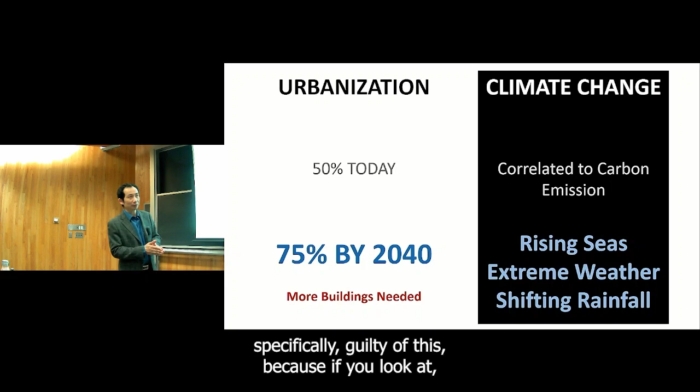We look at the challenges of the 21st century. We think about, as structural engineers, it's a fight between urbanization, where we need more houses, and climate change, because whatever human activity we do nowadays seems to have a negative impact for some reason. I don't know. But the construction industry is actually specifically guilty of this, because we're congregating into cities, we need to provide more density in housing. We build our cities out of steel and concrete. Combined, they are responsible for about 8% of total carbon emissions for humankind, which is actually surprisingly high.

There's other studies from some colleagues of mine who study building energy and all that. The buildings, this is just like the first down payment, right? Then you have to maintain the building, use energy to cool it down or heat it up. It's a lot of energy. But the things I studied, or the need coming out of this building infrastructure development, is more focused on the down payment side, which is what we use to build our buildings.

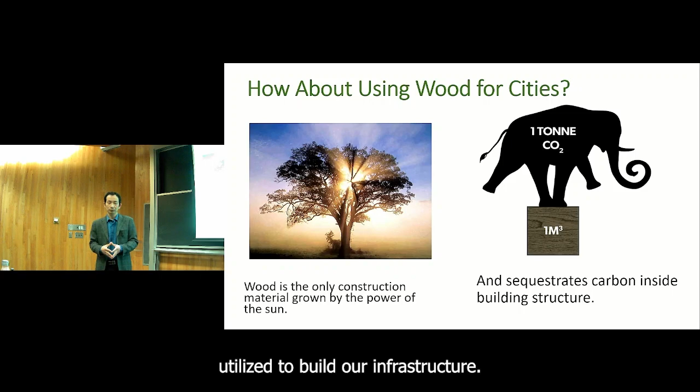The use of timber has been around for thousands of years. In fact, aside from mud and stone, it is the first engineered material humans ever utilized to build our infrastructure. The material, different from steel and concrete, is actually grown by the power of the sun, and trees suck CO2 out of the atmosphere and materialize it into fiber, where it provides strength to build our material.

As you can see, 1 cubic meter of wood, if you can take it and put it in a building, that building is going to be here for, you'll be surprised. You go into some old neighborhoods, you see stick-built buildings that have been there for 100 years. It's going to sequester that carbon for a long time. In fact, I'm coming from Colorado School of Mines, where people actually actively grab CO2 and pump it down into empty mine shafts to store it.

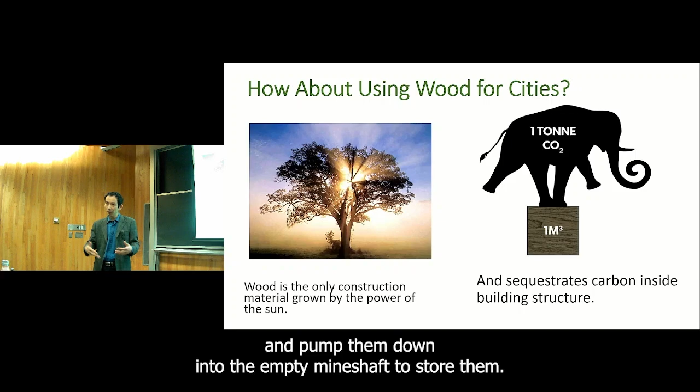But why don't we just build more wood buildings? The issue with wood buildings, if you look at, some of you took the class, it's what we call light frame wood construction. That's the most common in modern history. In older times, like in Japan and Europe, you had what we call heavy timber structures where they just use the whole tree, cut it, and build it. The issue is that although there's some pretty cool structures, like in Japan you have 5-story pagodas, our cities don't look like that.

We need something like this. You go above ground, and you look around, you see skyscrapers and tall buildings. Probably at the rate of urbanization right now, we don't need to be like China, where people all live in 30-story apartments. But I think hitting something between 10-story and 20-story would be kind of ideal for a population density like the US and the Western world.

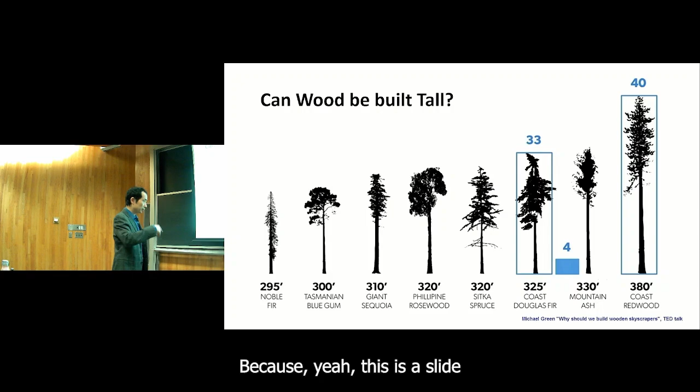So can we build wood that high? This is a slide I stole from Michael Green, who did a TED Talk called Why Should We Build Wooden Skyscrapers? If you haven't watched it and you're interested, you should search it up. Back then when he made this slide in Canada, since he's a Canadian architect, the building code allowed a maximum height of 4 stories for wood buildings in Canada. Now we have great improvement - it's going to increase to 6.

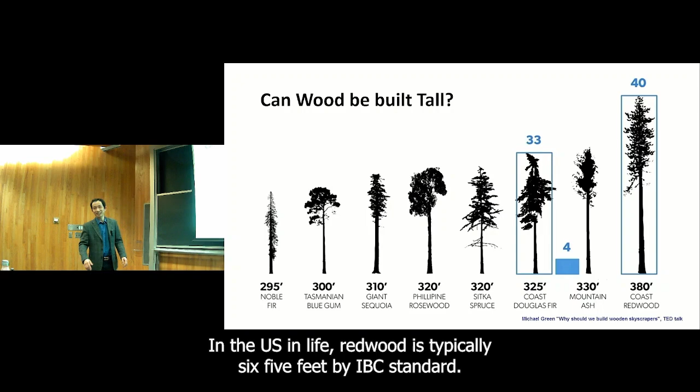In the US, for light frame wood, it's typically 85 feet by IBC standard. But if you look at natural trees, they can grow up to about 40... in fact, the most common wood species we use to build our 4-story or 6-story buildings can grow 33 stories tall. We call them Douglas fir, part of the fir family species.

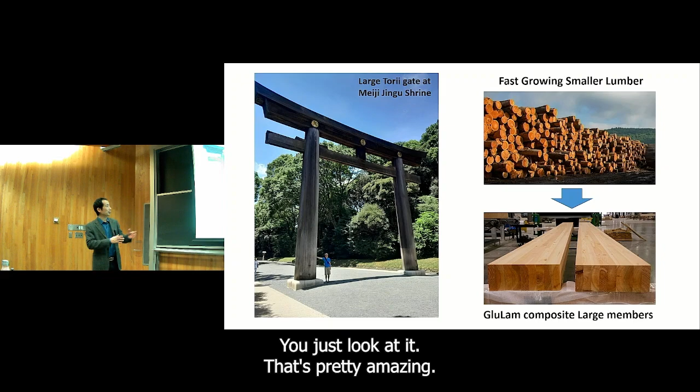So strength-wise, you don't need to worry too much. The way we build it - in ancient times, if you wanted to build a big, tall building, you needed a big, tall tree. This is a picture of me - this past summer I was visiting Tokyo. They have the largest wooden torii gate in Japan. Just look at that, it's pretty amazing. But we don't have that anymore.

What we have commercially available nowadays is fast-growing, small-diameter lumber. But we've also developed technology to glue them together to whatever size we want - glulam technology. A lot of people ask me about mass timber, saying 'oh, is the glue toxic?' Nothing is new here - we've been using glued-up timber members for a very, very long time.

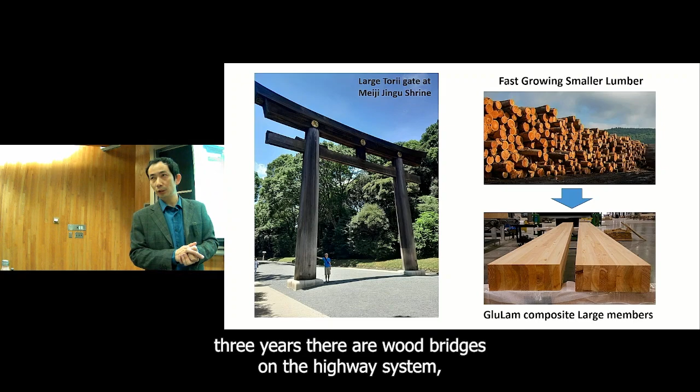If you just drive around the US, like in South Dakota where I taught for 3 years, there are wood bridges on the highway system that have been there for decades. But what really kickstarted the mass timber movement, as we see it, is a system we call CLT, cross-laminated timber.

The concept is quite simple - you just take a lot of small dimensional lumber. In fact, most of those, what we call laminas, are smaller than your typical 2x4. They actually take 2x4s and plane them down even smaller, then cross-laminate them, so you can have any odd number of layers.

Like you can have 3-ply, 5, 7, or 9-ply at some point. Suddenly you have the ability to build the entire building - not just your columns and beams, but the whole building with walls and diaphragm, everything in solid wood. Because before this, if you wanted a diaphragm, you had to do joists using OSB, and they run into the same problem with why we don't build wood very tall in the first place: fire.

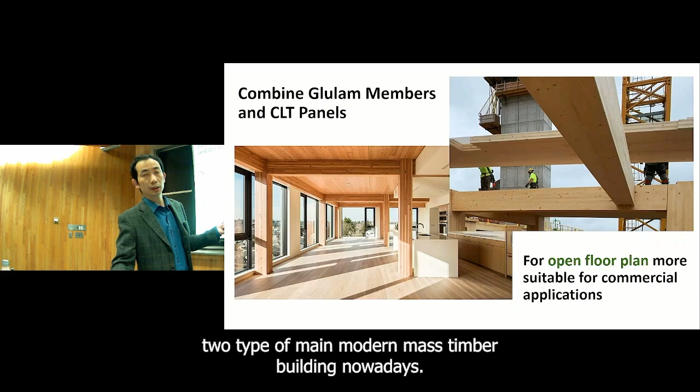Then I'll talk about fire, right? Fire is kind of interesting because it's counterintuitive - fire is actually one of the perks for mass timber. If you think about building something out of wood, under high temperature, wood is actually the only construction material that can resist high temperature for a prolonged duration. You might say, well, what about steel?

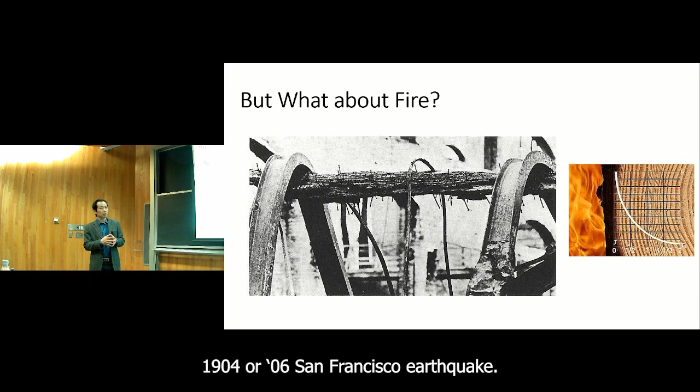What about concrete? There's nothing wrong with concrete, but it's mostly about the steel. Because when steel gets hot enough in an enclosed fire situation - like this picture from the 1904-06 San Francisco earthquake, where after the earthquake there was a fire in an enclosed warehouse situation - temperature rose to thousands of degrees. The steel under that high temperature starts to soften a little bit, and once it softens, you see things like this.

In the case of World Trade Center from the NIST report, it's not the initial impact but the fire that softened the steel column. Then you have a lower E, and your buckling load is calculated by the EI, then things buckle.

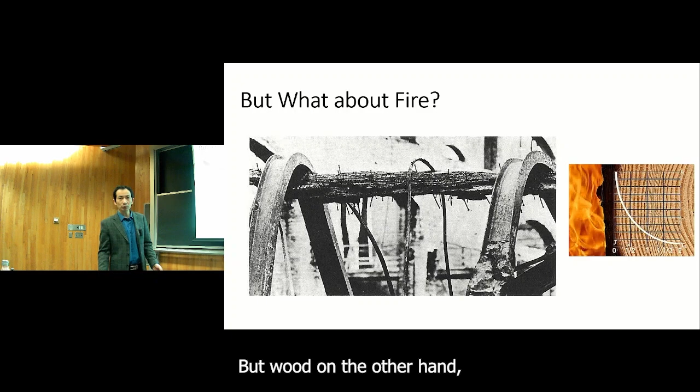But wood, on the other hand, burns too, of course. But once it burns, it forms a char layer. In fact, in wood fire design, we use a factor of about an inch and a half per hour of char layer. So once your char layer develops to like an inch or 2 inches, it's hard to burn through.

For example, this is a picture of a building they tested in Canada. It's just a chamber where they used gas to burn it for like 3 hours. Inside it looks pretty bad, but the researcher can actually put his hand on the other side. So in fire design, if you contain the fire within wood, it can actually withstand a lot of fire.

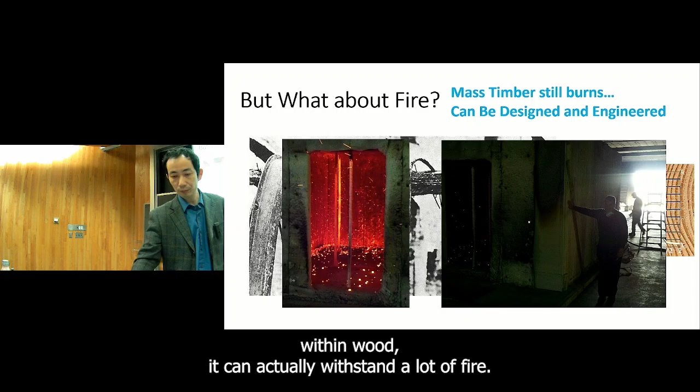So you combine all that benefit of utilizing mass timber components, including large section glulams and also mass timber panels. You have a new way to build tall buildings in almost 100 years, if you define a tall building as any building above 10 stories. Why 10 stories? I'll tell you why later.

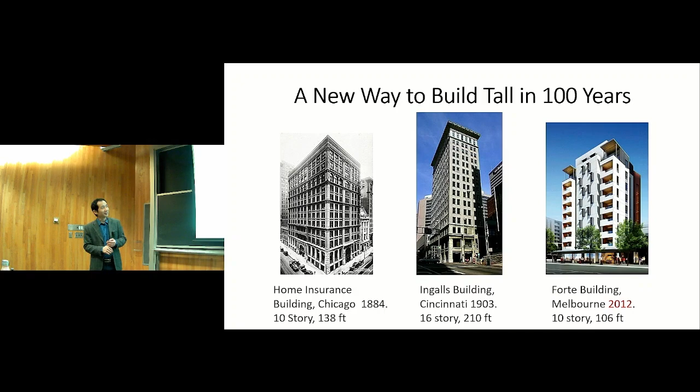So the first tall steel building is in Chicago, built in 1884. Then the first one in concrete is in Cincinnati, 1903. After that, if you want to build anything above 10 stories, you have to use those two types of materials, until that record gets broken by 2012, more than 13 years ago, in Australia.

The Forte building is 10 stories, apparently that was 13 years ago. So what is it now? About 10 years later, you have the Norway building, that's 18 stories, all wood.

This one's kind of interesting. In fact, last year they had the World Conference on Timber Engineering in Norway. Some people actually lived in it, this is a hotel, they kind of stay there. I didn't get to go because I didn't get my visa.

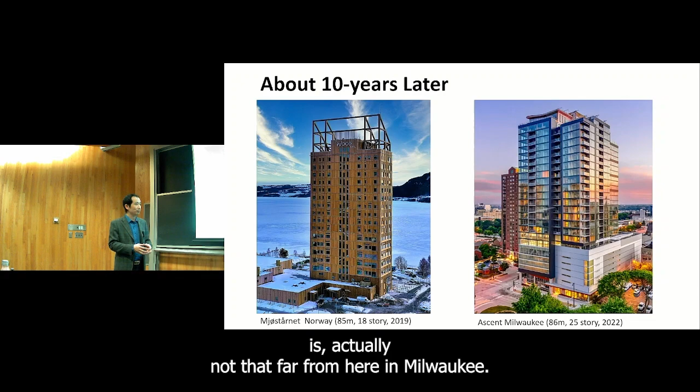So right now the world record holder is actually not that far from here, in Milwaukee. A 25-story mass timber building, but it cheated a little bit because it's actually 8-story concrete plus 17-story mass timber. So the Norway one, 18-story, is full wood.

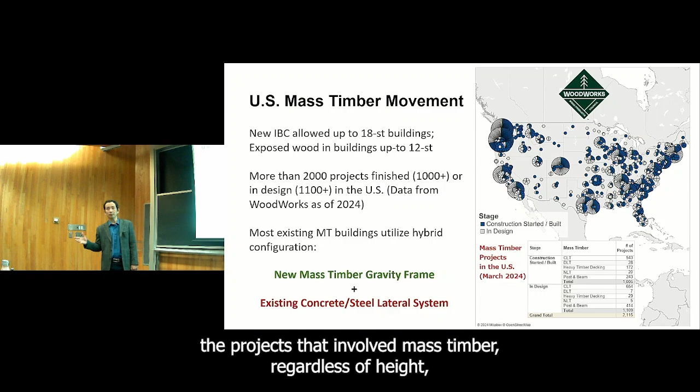So you've probably heard of this term called mass timber movement. It's not just the US, it's around the world, but specifically if you look at the United States, the projects that involve mass timber regardless of height—because most of them are like malls, 2-story, 3-story—there's about 2,000 projects around the US that have been planned or already built. In fact, like 1,000 of them are already built or under construction.

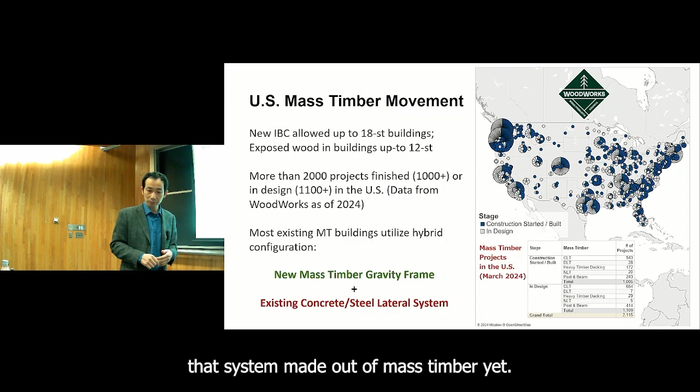There's a new trend for a sort of hybrid approach where they use a mass timber gravity system, like what I showed you, the glulam beams, columns, and panels. The lateral system, they use either a concrete core or a steel brace frame. Why? Because there's no code-recognized lateral system made out of mass timber yet. There's one, but people for some reason don't use it that much. And you notice a lot of those projects are happening in seismically active regions.

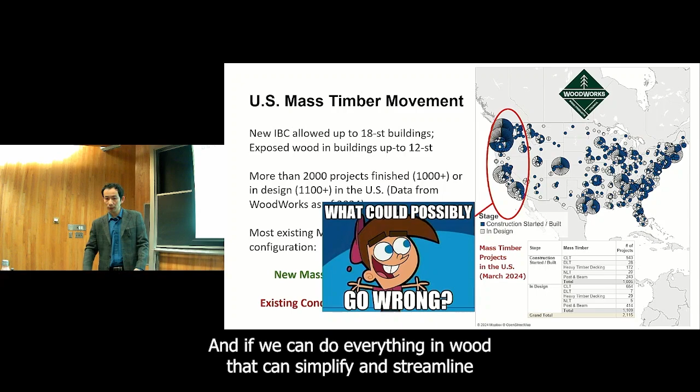So the idea of my research project—now kind of pivoting to what I do, I don't do all mass timber, just one aspect—is to think, if we're going to build that many mass timber buildings, instead of bringing a concrete contractor, a steel contractor, can we do everything in wood? And if we can, simplify and streamline the construction process, hopefully save money. And also, maybe if nobody's ever done that, it's a new type of combination. It's actually not a combination, it's just mass timber gravity system plus the mass timber lateral system.

Could we do it better? Could we do it right the first time to actually make our lateral systems more resilient than what's already been observed? I assume a lot of you, although there's no wood class, know what resiliency is, right? People talk about resiliency.

But seismically, I think a picture is better than 1,000 words. We can look at a very classic example of how the modern code system or modern design philosophy performed in a large earthquake in a highly populated region. In this case, the New Zealand Christchurch earthquake, a magnitude 6 earthquake.

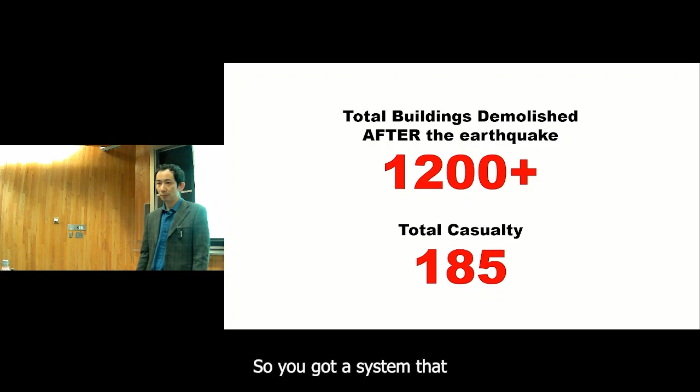What you see is, for some reason, after the earthquake, people prefer parking lots instead of buildings. This is what they call rebuild. So you've got a system, you've got an event, right?

It's not so much of a disaster from a casualty standpoint - of course, even one casualty is not good. But in fact, most of the casualties, like 180 some, came from one collapsed building in Christchurch, if you do the research. So most of the buildings, they did very good - they did exactly what our design code asked them to do, which is sacrifice themselves to dissipate energy but remain standing so people can get out. But the building, it dies.

This is called the code-compliant or life-safety requirement, which is the philosophy followed by most developed countries, with the exception of probably Japan, maybe Chile. So if something like that happens in downtown LA again, like Northridge, we'll have the same thing.

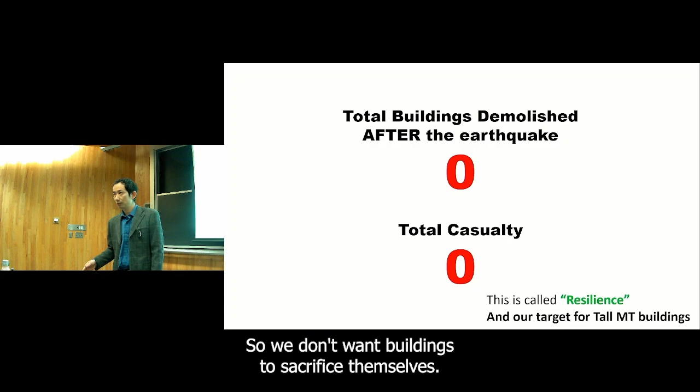What we really want is this - it's called resilience performance. We don't want a building to sacrifice itself. During an earthquake, we want the building to not only withstand it but also be at least repairable afterward. And wood is really in a good position to do that.

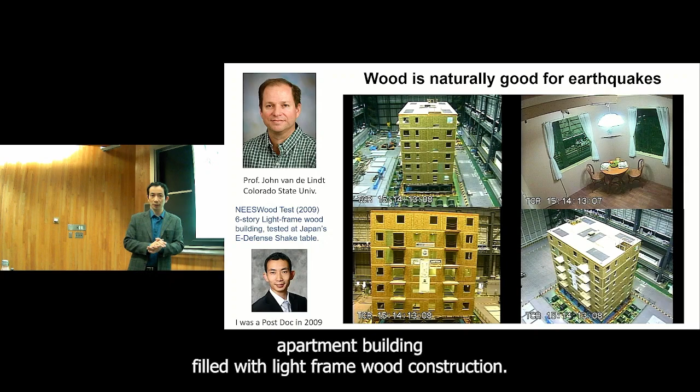Even 16 years ago - not that far, 2009 - there was already mass timber in Europe, but we didn't know that yet. Myself, as a postdoc back then, and my advisor Professor John van de Lindt, we went to Japan and tested a full-scale apartment building built with light-frame wood construction. We selected 6 stories tall because, like I said, that was the tallest we could build at that point.

So we tested this under a Northridge earthquake times 1.8. That's the test you're going to see here. It's a 3D test, and you see the room on the corner where the lights are on. The little plates you see there are the added mass - you've got to do the math right.

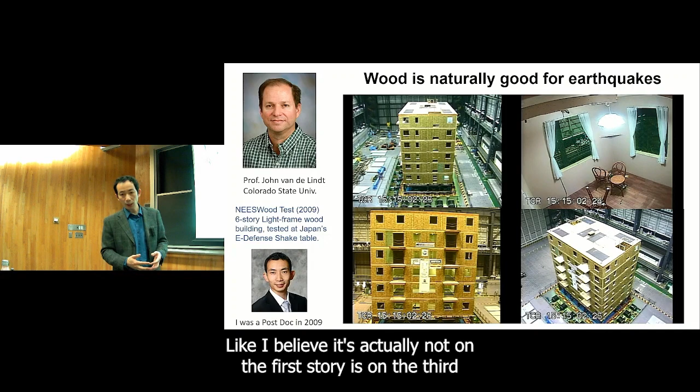We went to Japan and built this building in about 4 months, then ran 5 tests. Typically, when you do a big test, you do a small design level test, then this, which we'll call MCE, and after that we check the building. I believe it's actually not on the 1st story - it's on the 3rd or 2nd story. You see most of the damage: drywall cracks, some nail pull-out. But the building is great - it's actually repairable.

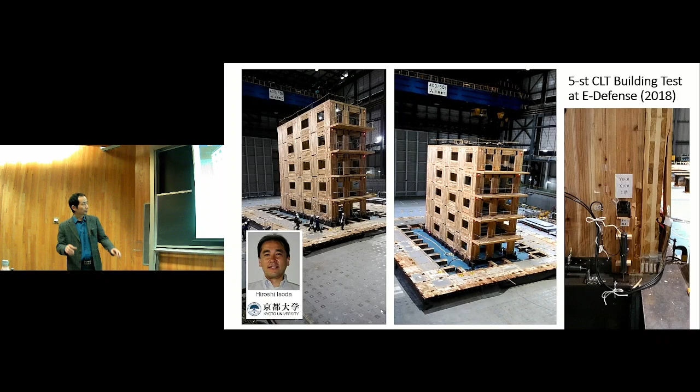After that, other researchers around the world started to say, okay, could we do the same thing with mass timber? This is a friend of mine, Professor Isoda at Kyoto University - they did a test of a 5-story CLT building, also at E-Defense.

Those tests basically give us confidence because wood is very flexible and lightweight, about a quarter of the unit weight of concrete. So yes, we can do that, but the difficulty with those problems is that traditional wood construction, including mass timber, develops ductility within the connections. If you want to develop ductility in connections for concrete, you need to yield your rebar. For wood, you need some sort of damage - the pull-out of nails or things like that.

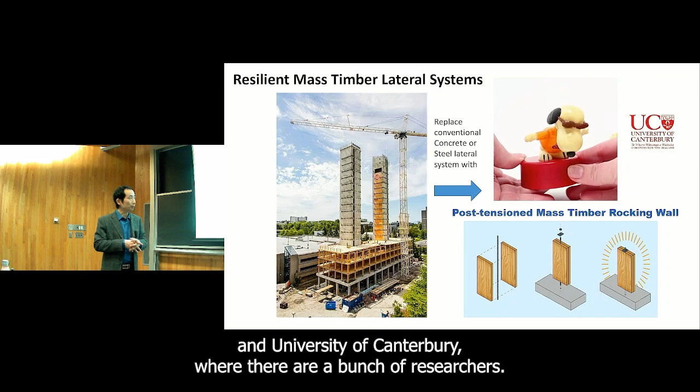So can we go beyond that? The idea came from New Zealand, at the University of Canterbury, where there are a bunch of researchers. They started as PT guys - post-tensioned concrete frame guys and all that. Then suddenly, because New Zealand, like Canada, exports a lot of timber, they thought, could we do PT on timber?

So they started thinking about what we call a rocking wall, which again is not a new concept - precast concrete rocking walls already existed. But the idea, if you've never heard of it, is just like a push puppet, where you have a PT bar on a block of wood or concrete. Then when an earthquake comes, it rocks.

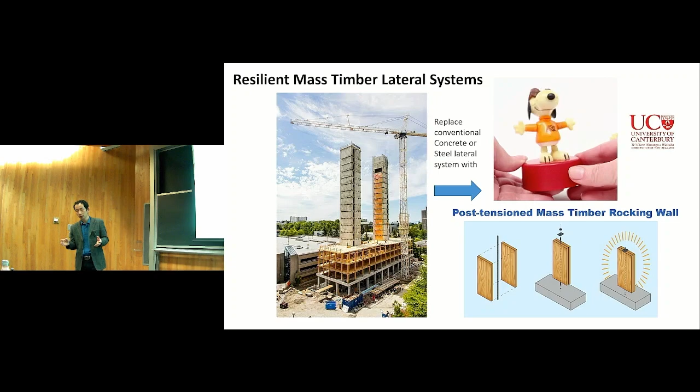If you fine-tune the PT force and concrete, the PT force geometry of your block, and also the area of the reinforcement to not yield during that period, then after an earthquake you're going to self-center. So we want to use that to replace construction, a hybrid construction like this. Use the concrete tower with... no, we don't want a concrete tower. We want everything wood, using a rocking wall.

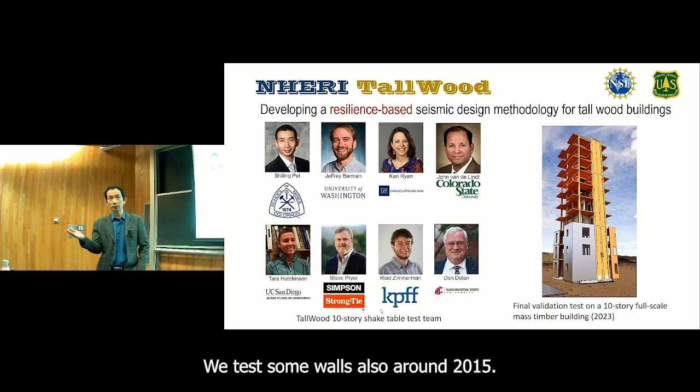That brings us fast forward a couple of years to the NHERI TallWood project, where we didn't go directly to a 10-story test. We actually did our normal component level testing first. We tested some walls at WSU around 2015, then we did a 2-story test on the UCSD shake table in 2017, then we got to the 10-story, which is the same picture you see on the title slides.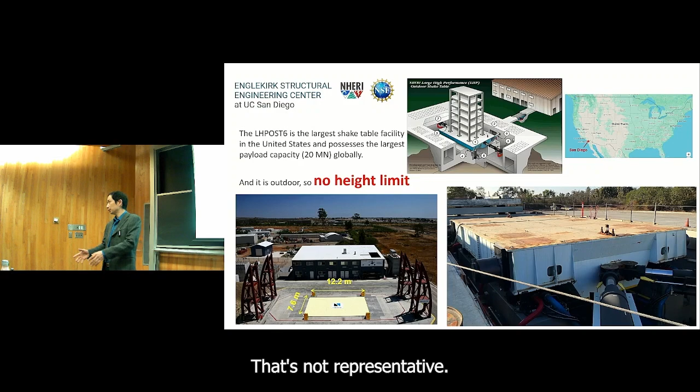This is the tallest full-scale building ever tested on a shake table anywhere in the world. I think we're going to have that record for a while. The UCSD shake table is in San Diego, and it's outdoor, which means you can build as high as you want. But of course you need to pay attention to your aspect ratio, because you don't want to test a pencil - that's not representative. It turns out a 10-story is almost the limit of that aspect ratio that could still kind of happen in real life. It almost represents a worst case scenario. So that's why we chose 10.

Another kind of funny thing is I always jokingly say that the only contribution I have to the NHERI TallWood project is deciding that it has to be 10-story. First, because it's double digits. Secondly, it's easier to fundraise.

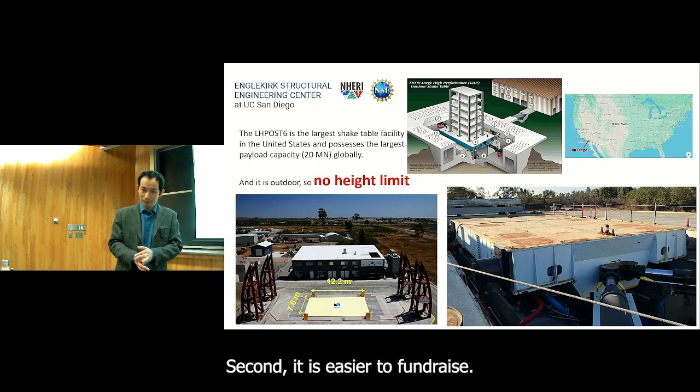When we proposed the project, the UCSD shake table was only 1D, but during that time they upgraded it, and it suddenly became a 6-degree-of-freedom shake table. Of course we didn't use the rotational degree of freedom in our test because seldom do people do that. But this is actually very neat, and I'm very happy about it, because you spend so much effort and time to build the building, and you want to test it in what they call a real earthquake, in 3D.

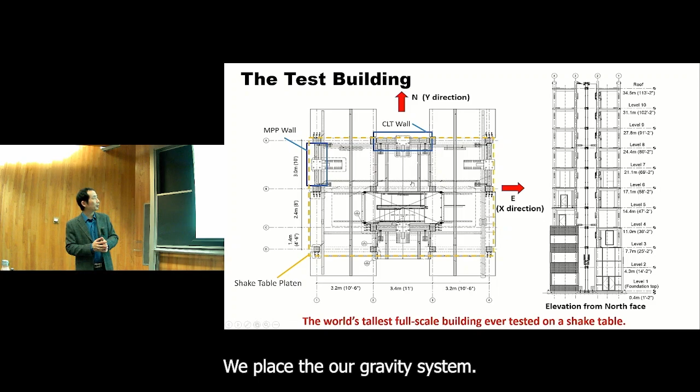The test building itself - as you can see, the yellow outline is the shake table. We placed all our gravity system, you see those columns, there's like 12 of them. Oh actually, yes, there are 12 of them, or actually 14 of them. And then we used overhangs to create patios where we could have different building facades, to look at non-structural performance, because we want to achieve resiliency, which means we also want to minimize damage to non-structural systems.

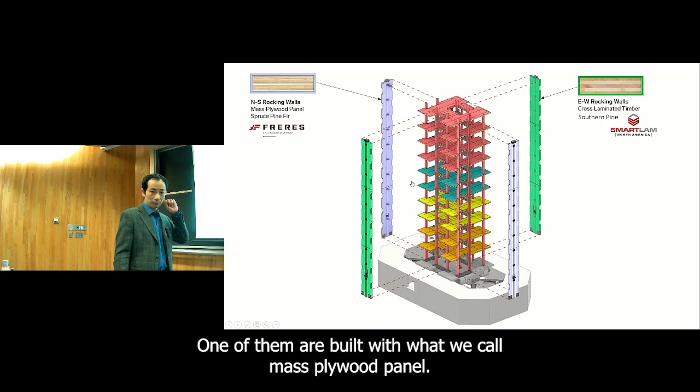The building itself is like a mass timber products museum, because we got donations from everywhere. There are 2 rocking wall pairs - one is built with what we call mass plywood panel, which is just plywood but you keep layering it until it's this thick, then you have CLT in the other direction. Then we have CLT and what we call GLT from Europe, donated for 4 stories. Then we have nail-laminated timber for the next 3-story, 4-story, 2-story sections. And finally another mass plywood type product from Boise Cascade for the top 4 stories.

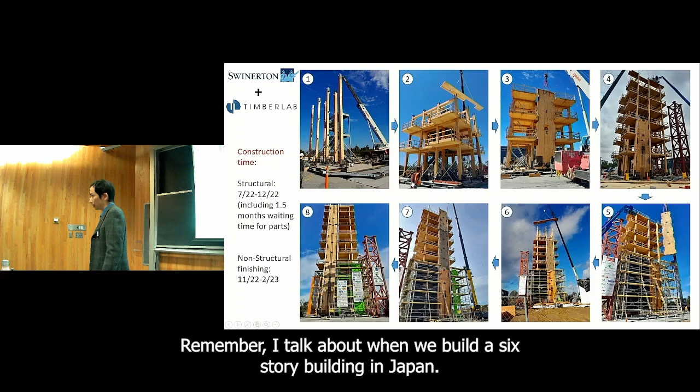All the connections were donated by Simpson, except the ones we had to specially design. The construction itself was actually quite fast. Remember I talked about when we built a 6-story building in Japan, it took us 4 months. This one also took about 5 months, but there were some little accidents in the construction process - we had to wait for a part to be manufactured, which slowed us down. So really, you're looking at about 3 months to do the whole thing.

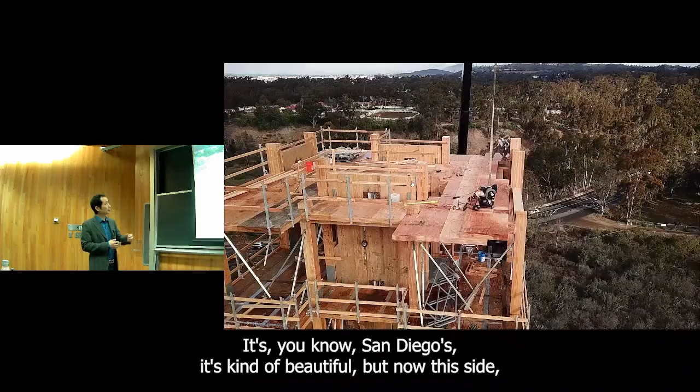Just to give you an idea of the scale, this is the last panel we put on the roof. It's a drone shot of San Diego, so it's kind of beautiful. On this side you have rural San Diego, but when the camera pans you see downtown San Diego. The ocean is on this side.

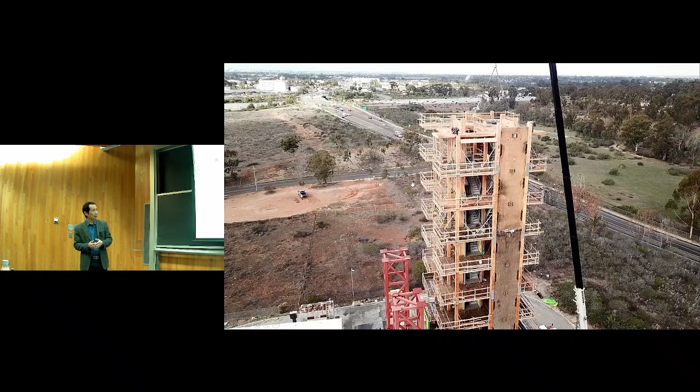It is really quite impressive. You see the red towers? Those are 6 stories tall, and they are there to prevent the specimen from collapsing into the white building down here, which is a control building with all the hydraulics. They're like, oh yeah, we have a 6-story tall tower, should be enough.

The PI of the site actually asked me to bolt some anchors with steel cables to tie the top 4-story to the other side of the testing site. But in the end, everything works out. We didn't collapse it. I don't think they'll ever let us.

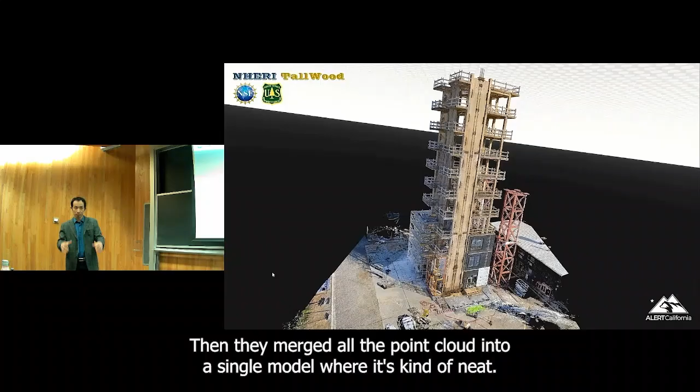So after the construction, we went into what we call the instrumentation phase. This is just a cool thing that we want to show. There's a collaborator at UCSD. They use LiDAR on a drone and handheld device. They walk the entire building, then they merged all the point cloud into a single model, which is kind of neat.

So if I was not sure if this type of connector was used, I can actually go in and check every single screw in the point cloud database. Nobody's ever done that, but the data is there. So the building is not there anymore, but yeah, this is very pretty cool stuff that you can use.

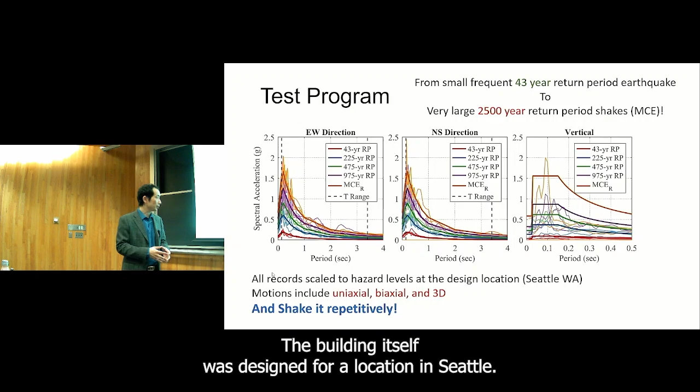The test program, apparently you're gonna kind of ramp it up. So we actually targeted 5 levels. The building itself was designed for a location in Seattle. That location is actually chosen by the graduate student working on it - it's her favorite coffee shop in Seattle.

So you can see we're trying to match the ASCE 7 response spectrum, the multi-period response spectrum of the location. For the vertical, now that's kind of new for ASCE 7. We didn't try to match it, but it's kind of a ballpark - it's about right.

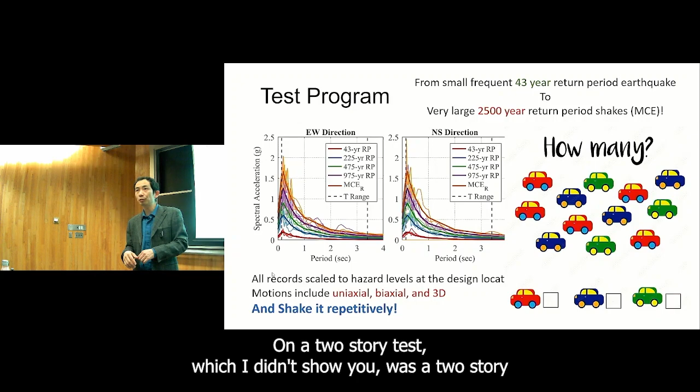But then the question is, okay, how many earthquakes do we want to run? I was first asked about this, and I said I don't know. Because if you think about it, in Japan we run 5 tests, then we have to stop because everything's cracking. Then on the 2-story test - I didn't show you, but 2-story mass timber with rocking wall - we ran 14 tests. So for this one I said, oh yeah, we'll run at least 20. But who knows, right? You just keep running, but it just refuses to get damaged. And then we're like, yeah, since we can get more data, why not?

It's so much effort. So what we did is we ran a total of 88 tests in the first phase, where you can see the PGA, peak ground acceleration, of the earthquakes. You can see we kind of ramp it up to the design basis earthquake.

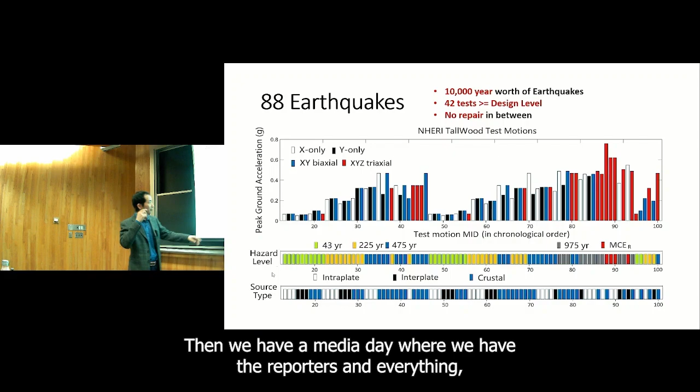Then we have a media day where we have the reporters and everything, NSF folks, and then after that we get everybody out. Then we keep ramping it up to MCE, and then finish it off. As a matter of fact, if we're not confined by the subsequent phases that are coming after us, that we have to kind of get going, we could easily run more.

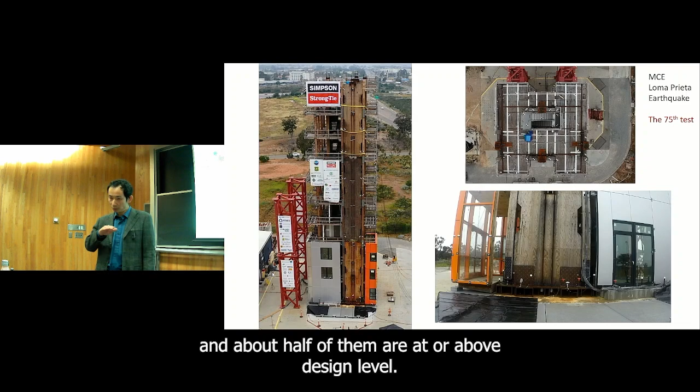I'll show you just one, but apparently it's going to be the largest one - this is the 75th test. Remember, this building has been going through 74 earthquakes, and about half of them are at or above design level. And this is the 75th, without any repair or any care.

So you see a top view that's from a drone, and then you see a close-up on one of the rocking walls at the base, and then the overall building. And also this is a 3D test, so you hear the vertical component coming out first.

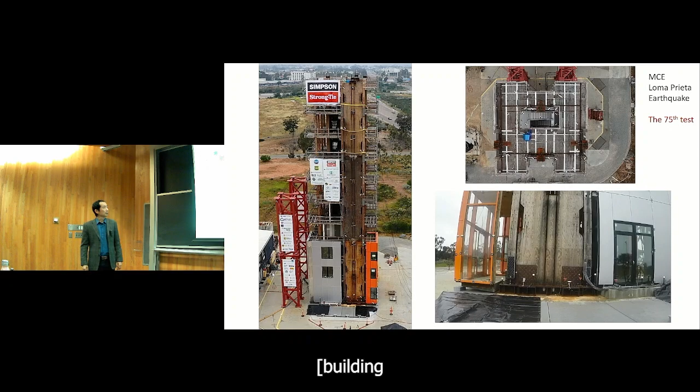You can very distinctly see the 2 phases of the dynamic response. The first phase is when the earthquake input has a lot of higher frequency component, where you excite the building in a higher mode. And later, when the earthquake starts to die down, you see the building revert to the first mode, and the first mode actually produces the maximum displacement demand. The higher modes produce the maximum force demand.

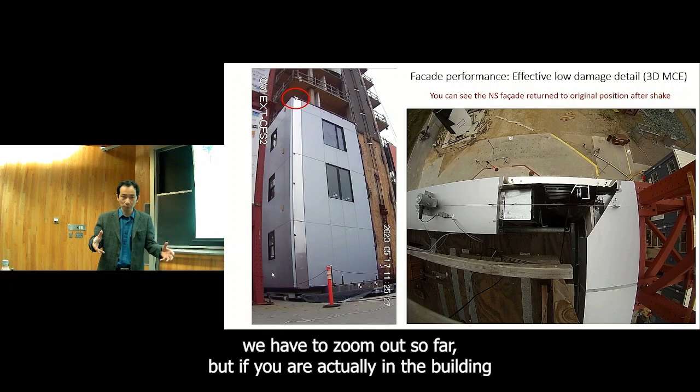So the video you just saw, we had to zoom out so far, but if you're actually in the building, as you can see, the non-structural components - this is the facade where we use a sliding detail. You'll know exactly what I mean after you see how it moves. And then we have a GoPro camera looking at the corner of those 2 facades from above.

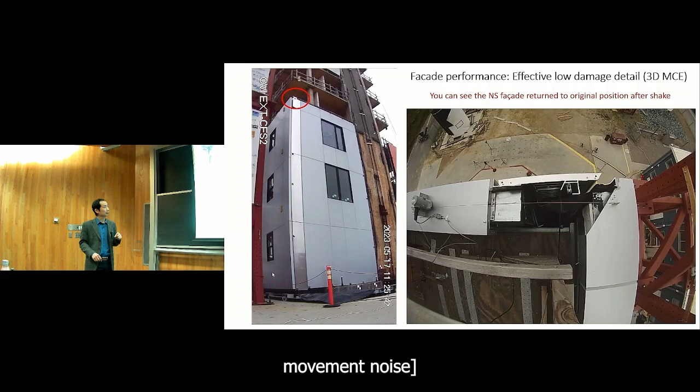That's the first mode. Yeah, you move a lot.

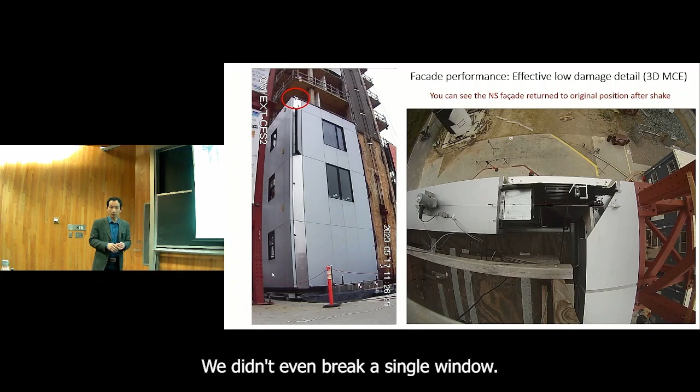This video is great because it proved 2 points. First, if you detail your non-structural systems carefully, they can remain damage-free. We didn't even break a single window. Second, non-structural systems don't have the ability to pull themselves back, but the fact that you see them ending exactly where they started means the building self-centered. So I don't even need to show you why it's self-centered, because the non-structural systems came back, you know the building is self-centered. Of course, we also have direct measurement evidence that there's no residual drift.

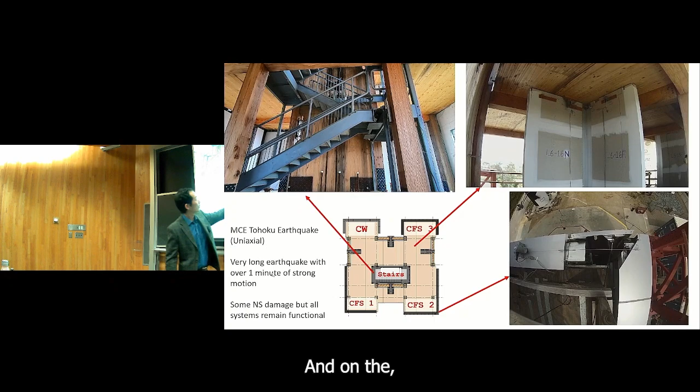Here's some more non-structural detail. You can see the stairs where we have the flexible joint, and on the drywall we have the sliding detail on the top.

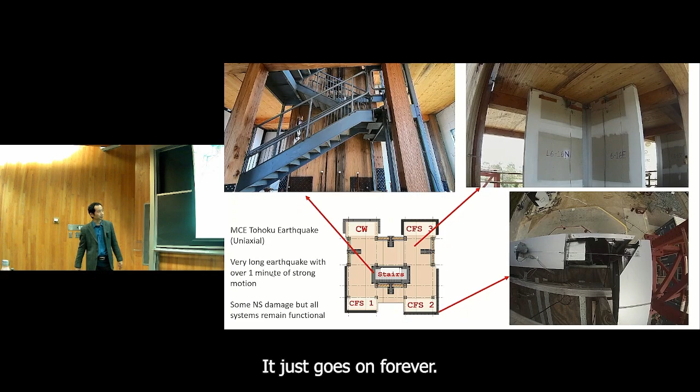This is also one of the shake table tests using an earthquake record from Japan, from the Tohoku earthquake, the one with the big tsunami - remember, that kept shaking Tokyo for like 3 minutes. What you see here is 1 minute of strong motion, and it just goes on forever. This earthquake is so large that the shake table can only run it in 1D, so that's why you only see it in 1D. But you still see the exact same behavior, everything back to its initial position, and the building recentered.

After this - like I said, it's phase 1, 88 tests - we had a researcher from Michigan Tech come in and add 2 huge dampers on one pair of the rocking walls. He did another 19 tests.

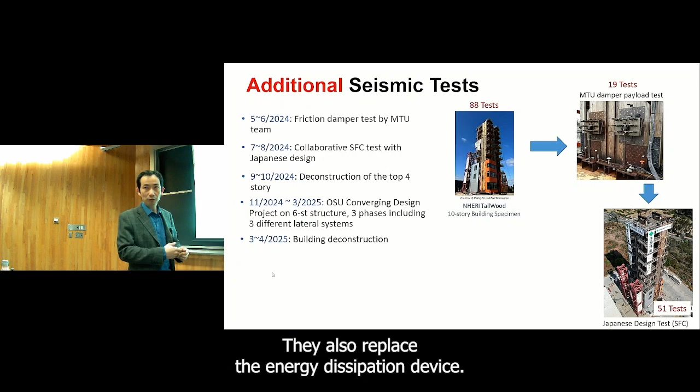Then our Japanese collaborator came in and removed our PT on the wall. They shipped some bigger PT from Japan, placed them in a different location on the wall using their design requirements, which are much stiffer than the US. They also replaced the energy dissipation device and did another 51 tests.

Then we took the top 4 stories off. It became a 6-story building, handed to Oregon State University researchers. They did another 3 phases, a total of 86 tests. So if you look at just the gravity system of the bottom 6 stories, that's 244 earthquakes. It is likely the world's most shaken full-scale building, but out of all that, there's no structural damage and no residual drift.

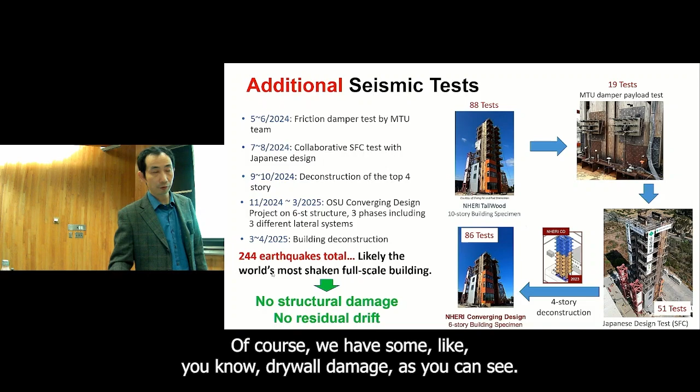Of course, we have some drywall damage, as you can see, but the stairs, everything's fine.

So what's the main takeaway? You still remember the resiliency target I showed you after the Christchurch earthquake - zero building casualty, zero people casualty. It's totally achievable and practical with mass timber construction.

In fact, you don't even need to do too much. You just need to replace your concrete or steel core with a post-tension mass timber rocking wall. Non-structural systems just go along for the ride. The gravity system is key, because you have to have a beam-column joint that can go back and forth 1,000 times without losing strength.

But it can be done, and we have a paper that's free to view. Just search my name and '10-story test' and you'll get it.

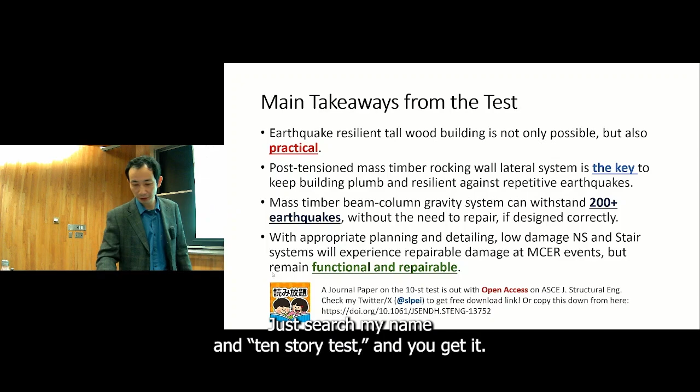So what I'm working on now is trying to put the mass timber rocking wall into the US code. We're trying to catch the ASCE 7 updates in 2028. We're doing a P695 study supported by the Pankow Foundation with a very brilliant engineer, Reid Zimmerman from KPFF. So we'll see how it happens, we'll see how it works.

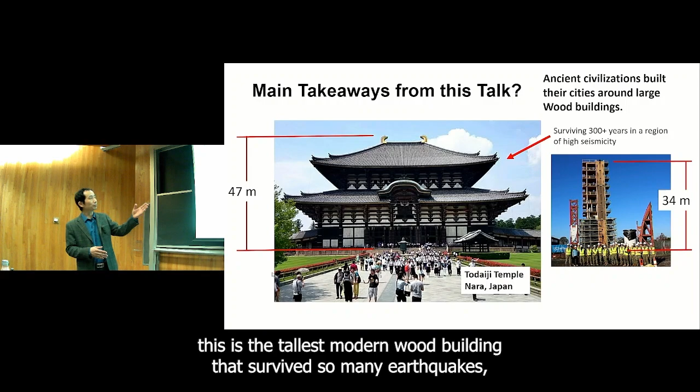The main takeaway again: if you think about it, this is the tallest modern wood building that survived so many earthquakes. There's really nothing new under the sun, right? Japanese have been doing that for hundreds of years, even without a lateral system. If you ever visit Japan to see those temples, they don't have a lateral system, so yeah, they must know something.

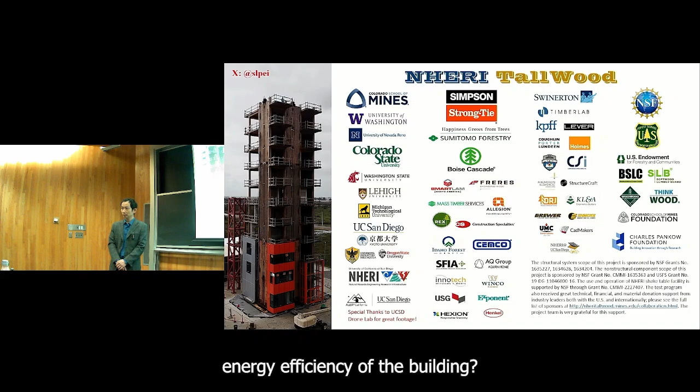Thank you again. Yeah, the opening we saw is mostly on the corner. The short answer is I don't know, because my co-PI, Keri Ryan at Reno, is kind of in charge of that. But I think it will have some negative impact. I'm not an expert in building envelope. Yeah, it will not be as airtight as a traditional detail.

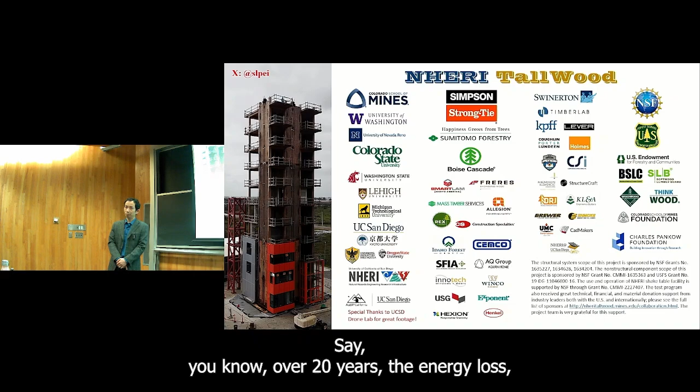But I think the trade-off is that if you're in Minnesota, I'd say go with the traditional. But if you're in San Francisco, maybe you can do the calculation—say, over 20 years, the energy lost, is that worth it to implement that to let it survive an earthquake, or can I afford to just do traditional and let it break? I think by the end of the day it probably becomes a financial question, which will require some study.

And then also, aside from that, at the corner we have some windows. There are some companies that actually do an air leakage suction test before and after. I don't think they've published the results yet, but I think results will be coming—or maybe the company will make it proprietary if the results aren't good. But yeah, I think that's definitely a concern.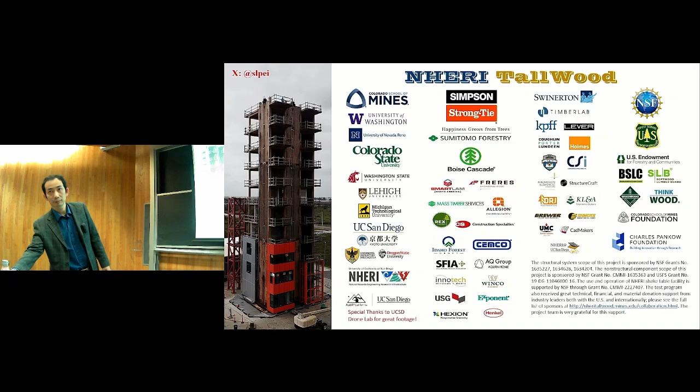When do you decide when the building is not repairable? Is it like when the wood starts to splinter, or is it at some point before that? Yeah, whether a building is repairable or not always depends on how much money you want to pay.

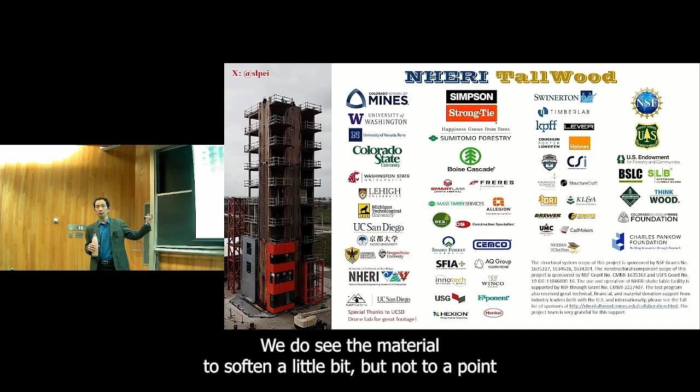For our case, we actually send student teams, each one focused on one area of the building. After every test, we go do inspection, try to find visible damage, and we also keep an eye on the natural period of the building. For this one, there was no visible detectable damage. We do see the material soften a little bit, but not to a point we're concerned that we need any repair or special intervention.

But for a typical wood building, like when I showed the damage in the Japanese test and some of the early tests on light frame, yeah, you see it. And then maybe it's more of a question of asking your contractor, is this repairable? Sometimes, even for a CLT panel, when it's split and all that, you could essentially just cut that part out and use epoxy to glue a new piece on—it's still repairable.

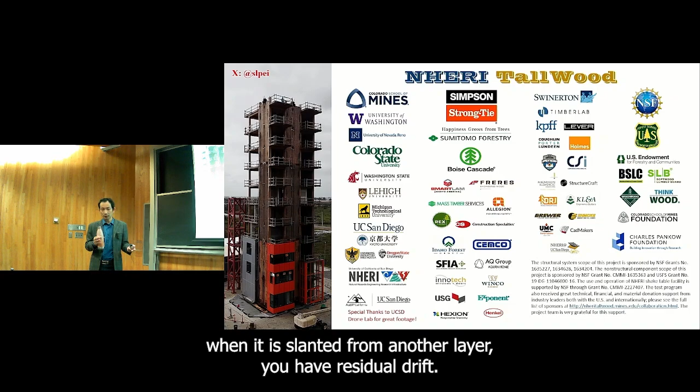But I think the main contribution of this system, that you don't need to repair, is the self-centering aspect. Because for a building, after an earthquake, when it is permanently slanted, you have residual drift—that's when you say maybe not. But as long as you don't have residual drift, I think most of the damage can be repairable, as long as you feel it's economical to pay for it.

Yeah, so that's our mentality. By the end of the day, it's the owner's choice. But if you have a 3% residual drift, I don't think it's the owner's choice—you get a red tag, then you've got to tear it down anyway.

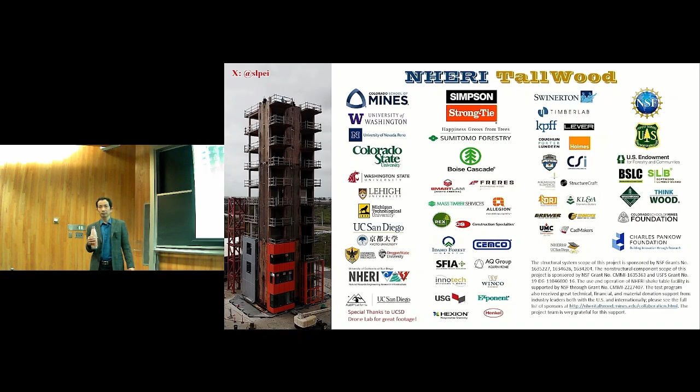Very interesting project. My question is a follow up on the conversation about the behavior of the lateral system. With the post-tension elements, I'm assuming the goal is to keep them elastic because you want that recentering. Okay, so with that, what would be the sacrificial element in your lateral system?

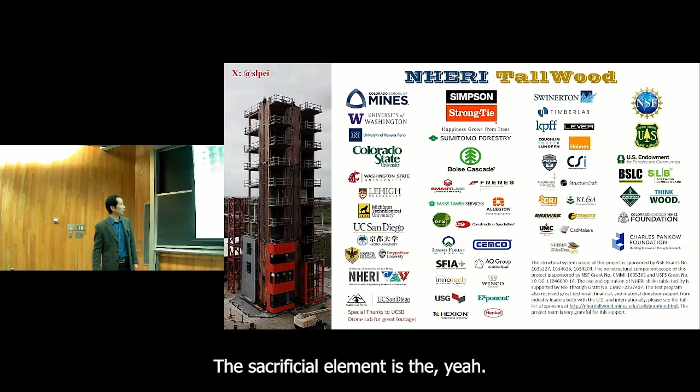The sacrificial element is, I didn't include this, but I included it in our other talks when I have a little bit more time. It's the U-shaped flexural plate, which is not something new. It's a simple passive system used extensively in concrete rocking walls. So we use the same thing.

Yeah, that's a good question because for rocking walls, everything is elastic, so you've got to dissipate energy at some point. In fact, in our design methodology for this rocking wall system, we require the yieldable elements, the plastic elements, to contribute at least 1/8 of the moment capacity.

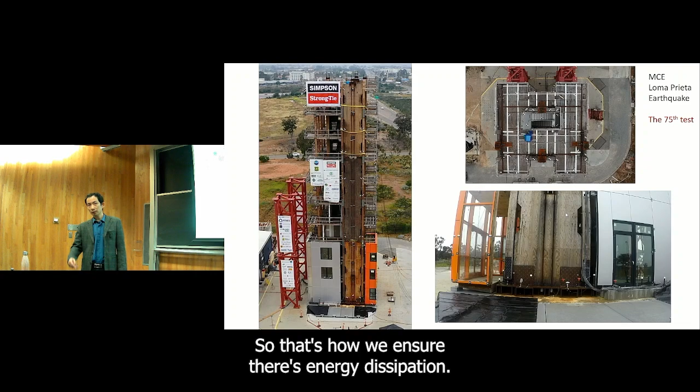That's how we ensure there's energy dissipation. Did you implement them in all levels, or certain levels that you thought would have maximum drift? Because the rocking wall system is balloon framed, it doesn't matter which level you put them in. So in this case, we just distribute them evenly along the height.

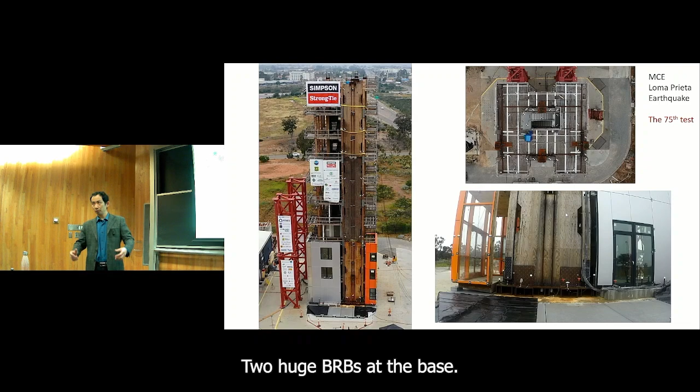I think that's typically what people would do. But in some other cases, like a 6-story test phase I didn't show from Barbara Simpson at Stanford, she concentrated them as two huge BRBs at the base. Either way, it's a rocking mechanism.

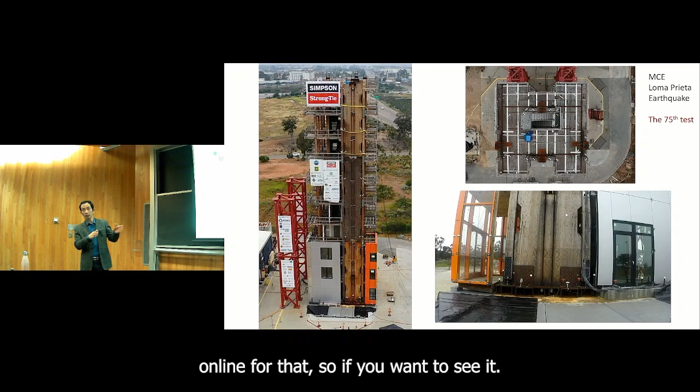If you look at the reports online, the design of the beams and columns, they're all over designed. They're designed for actually a 2-hour fire. And if you just check structurally, they're so over designed that you don't need that because the span's not that high. But our collaborator from Simpson Strong Tie wants to make sure we're mimicking the correct geometry of the joint.

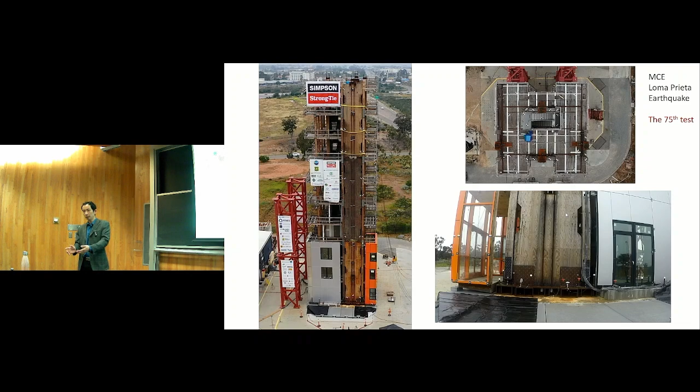So for a beam column, it's a special steel hanger that's almost like a true pin. Then for column to column, we use a rigid splice from Simpson Strong Tie. But at the very base of the gravity column, we use a 2D pin. They're all steel.

There might be a way to do simpler connections than what we've implemented here, if you're building a real building, because a real building only sees one or two big earthquakes, and this one is a handful. So when we design a beam column joint, we actually design it so it can withstand 5% drift without any damage. That's a little bit overkill, but at least we've got the methodology down.

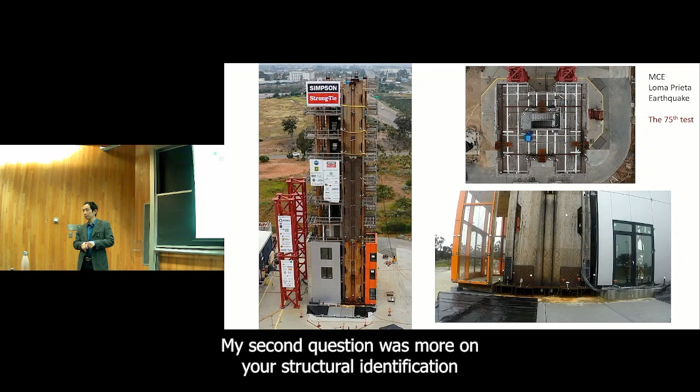So what's your second one? My second question was more on your structural identification throughout the test. It looked like you had a series of small tests along the way. Were you using those for ID, or what was your objective there?

The ID is done by white noise. For every major test, before and after, we do white noise in 3 different directions. Later we found out that vertical doesn't do anything, so we just did 2.

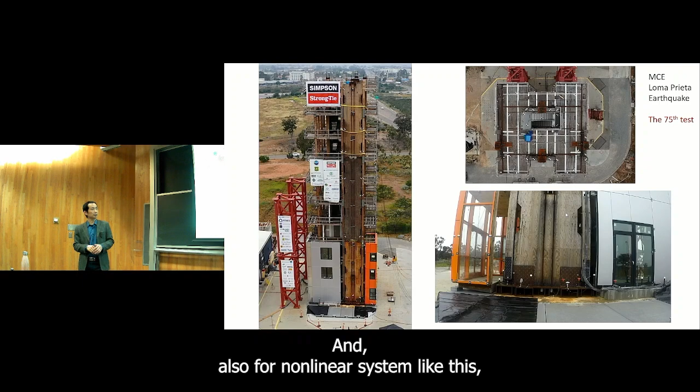In my paper, if you read, there's a degradation of stiffness, but we just can't see any damage. Also, for a non-linear system like this, the ID using white noise is sometimes not that accurate because it doesn't engage the rocking mechanism. So the small earthquakes are really mostly to collect data. The IDs were done through white noise.